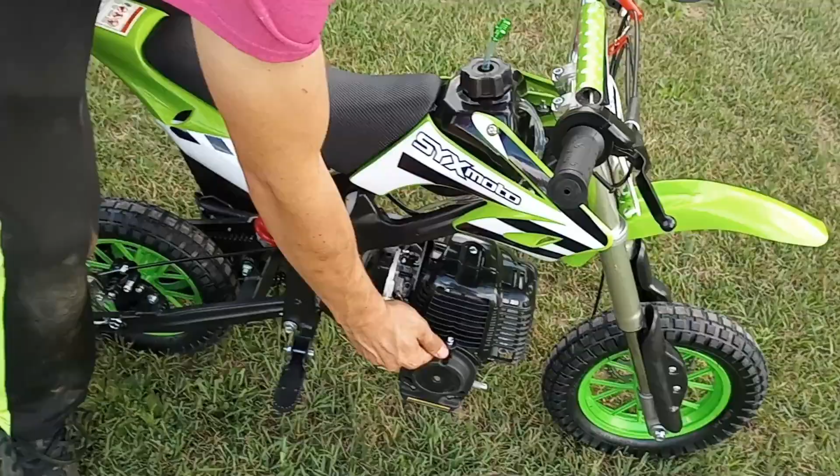How many pulls are we guessing? I got 5. 5 pulls? I'm saying 3. I'm gonna go 7.

All right, in today's video guys, we're gonna go over an unboxing of the SYX Moto 40 MT-2, which is a 40cc 4-stroke little bitty kid's dirt bike. Your age range is going to be probably from 5 to 8 years old. We're obviously much older than that, so we're going to try to drive it too, but we do have a young kid rider that's going to test it out for us and give us the skinny on it, how it handles, all that stuff. But mainly today, we're going to rip it open out of the box, set it up, tell you what tools you're going to need, if there's something damaged or whatnot, or what to look out for.

This is going to be the green one. I believe there was a black, blue, green, and red, and they actually put a sticker over the one that was selected. So I think we got a razor blade, we're going to go ahead and start cutting the box open.

SYX Moto was kind enough to send us this bike to test it out and review it, to see if it holds up to our standards, and for the price point too. It's on sale right now for $379. So less than $400, something the kid can ride around on.

The big seller on this too is it's not a 2-cycle, so you don't have to mix gas and oil. It should be a little more durable, should last longer than a 2-stroke, with sand and dirt and dust.

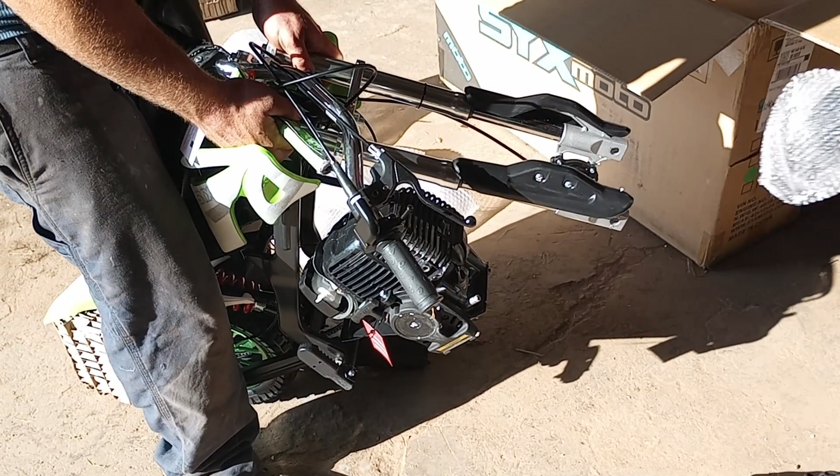Yeah, hold on to these. I like the polka dotted bar pad. Zip tie holds the bar pad, Mark? Yep, the bar pad, polka dotted, nice. Should I pull this?

The shock's just got to get bolted in too. Yep, that's cool, they squish it all down. That's everything there. We'll let it rest for now. It sits, the engine, it's like so flat, it sits right on it.

Look at that, it actually looks pretty sweet with the gear case. It's got like a reduction box here. I'll show you guys a little this jack shaft mechanism, pretty much.

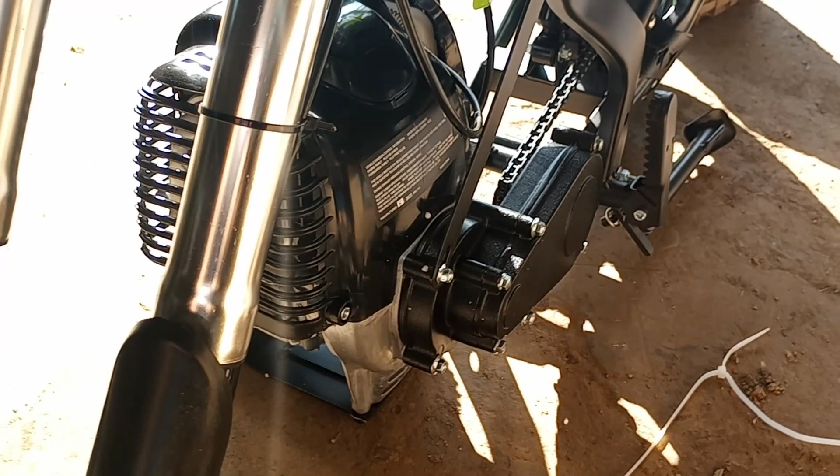And now these, like I said, these bikes are designed not to go fast or accelerate fast. They're meant for somebody that's learning how to ride a dirt bike, like you rode a bicycle, but you want a motorized bicycle basically.

Got a lot of nephews and... Max speed on this bike is 20 miles an hour. We will test that theory, we'll put a GPS on them. Kid, not with us. Not with us, with a young rider. We'll give it a chance to actually win that fight.

But 20 miles an hour is good, and it comes good with a speed tether too, so in case the kid falls off.

Very nice, I will definitely go over the features when we get the bike fully assembled. I want to see right here would be a throttle limiter, so you could tighten that in, and I feel like the more you tighten it in, that'd be less throttle.

Correct, definitely we'll go over all the features once the bike is together. Look at that, all the decals are covered.

One replacement lubrication oil every time, please. Maybe for the gear case. How much oil does it take? For the gear case, or maybe the engine oil, how much it takes? Yeah, they give you a bottle. We'll check the owner's manual.

Toolkit. There's the axle, front, yeah, because the rear one's already in. Front axle bolt. Do you want to get the front axle bolt in right away, and then we can put on the kickstand? Yeah, and then we got some other plastics.

I'd say metal. Is it aluminum? It's so hard, it's aluminum.

Comes with a full toolkit to put all the parts on. Spark plug wrench, 17 too. Wrench, 17, 13, 14, 12, 8, 10. Don't even need other tools, they send you this in a pouch.

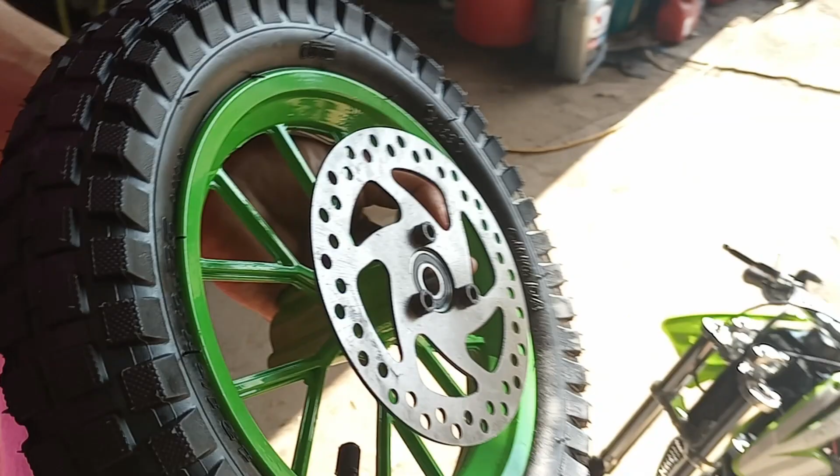Everything for the bar. Probably advise brake cleaning off the rotor. They just put that on there so it doesn't rust, guys, put a little bit of oil on the rotor. It would most likely burnish itself in, but the rims look to be aluminum.

I don't think they're plastic. It doesn't look plastic, it feels like it if you know what I mean. But yeah, that's not a plastic sound, I think that's metal.

Spacers. I'm gonna grab a little grease for the axle bolt. Yep.

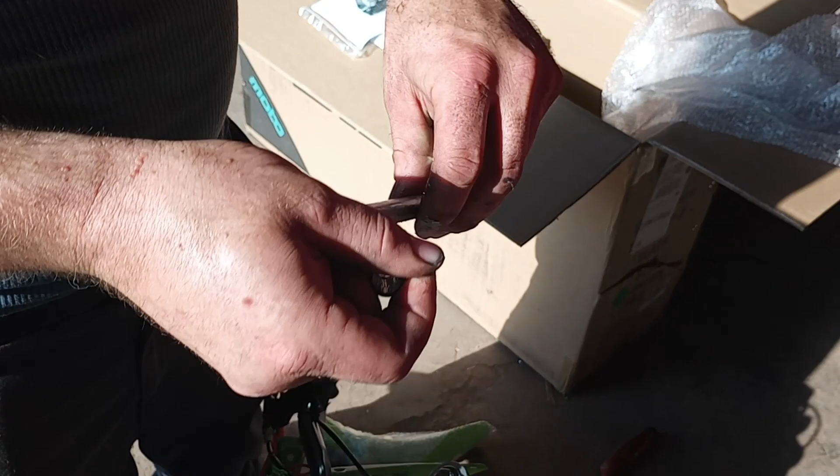One thing we're doing, guys, is we're putting a little bit of grease on the axle bolt that is not supplied with the bike, but you should definitely do that to preserve the bearings and everything, and just so it doesn't rust tight if you ever have to service it.

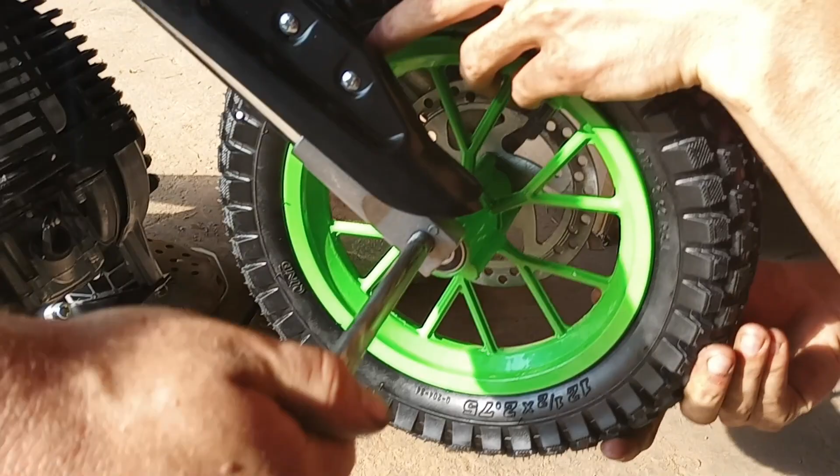There are actually parts available for these bikes too, guys. So if something breaks while riding it, it's not like you can't get parts for it. There were parts on SYX Moto's website, so super cool that they actually have a little bit of part support. That's one of the hardest things with Chinese and non-Japanese machines, the part support.

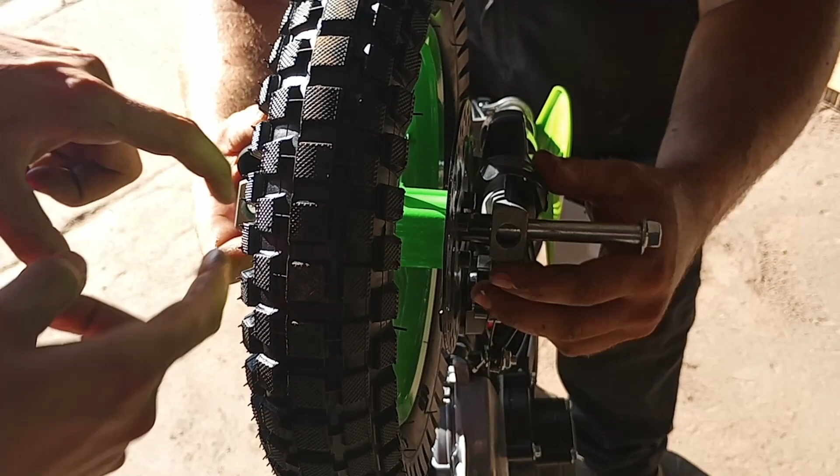What we did to get the spacers to fit in there, because the forks are a pretty tight fit, pried in, so you have to kind of pull them apart a little bit to get the spacer to fit on this side. You have to put the spacer on the caliper side on first, because otherwise you can't fit it in between the rotor and the bottom of the fork.

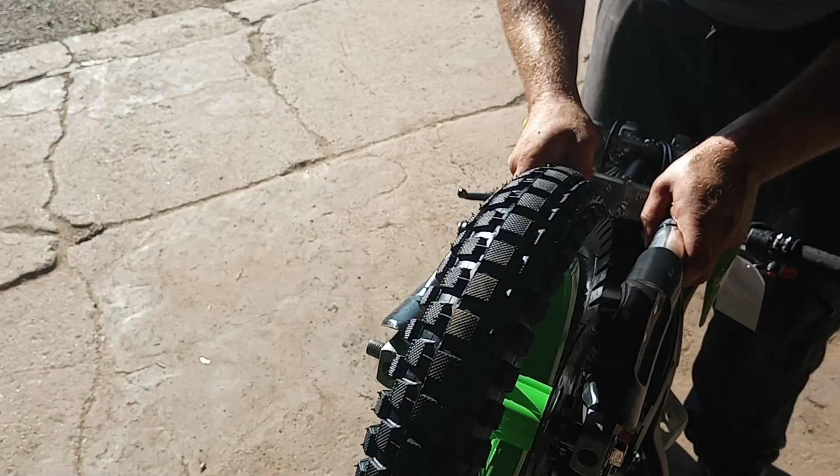The manual does specify to put the bolt in from the caliper side across, so that would be from left to right when you're sitting on the bike. The instructions are about a front and back page of the manual, so not a lot of instruction there, so hopefully this video might be a little bit better to understand than the instructions.

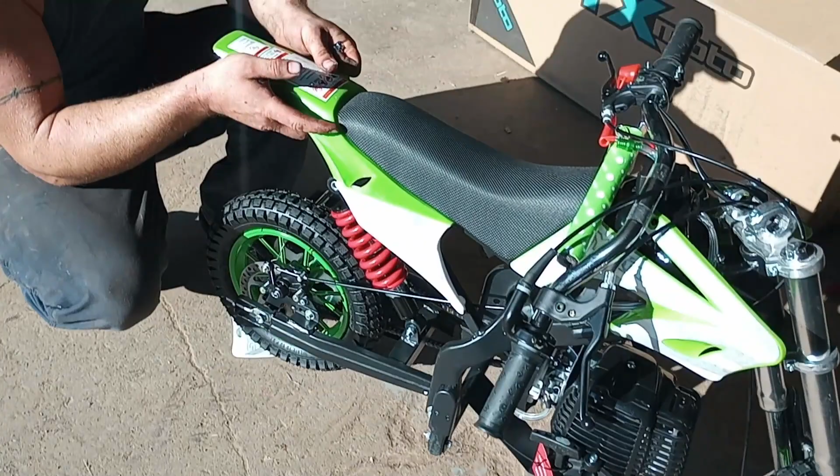The only other thing that we're doing right now is just putting the upper shock mounting bolt on, and that's also going to tighten the chain and everything as well. I assume we'll have to compress the shock down a ways.

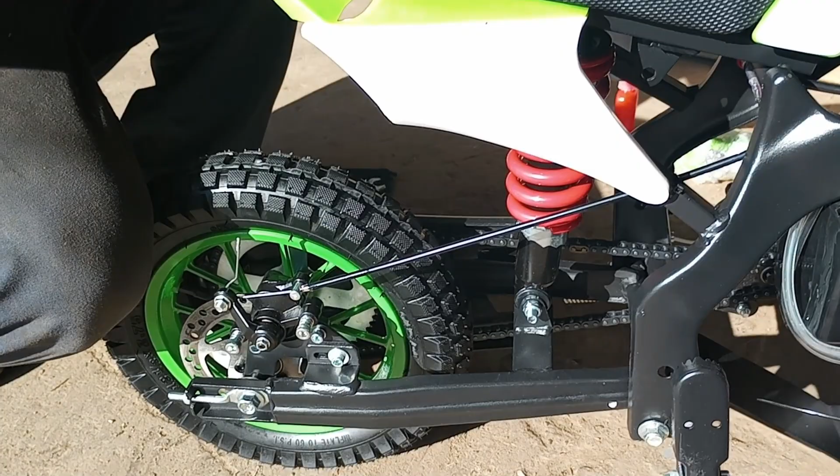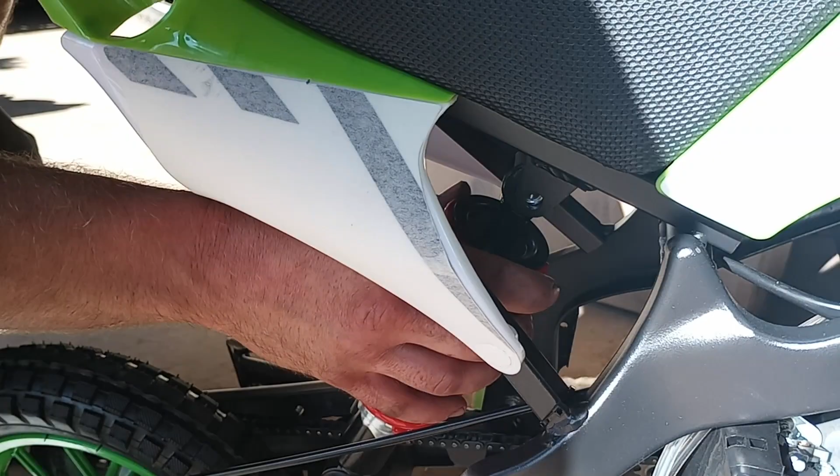Oh, now you got her. It goes way up front there. Oh yeah, you're right there. Right about there, guys. Let's pick it up a little bit. There you go.

Yeah, because it's the nuts on that side on the bottom, so we'll put them the same way. She sits pretty stanced in the rear. Yeah, and it is a nylon lock nut, so it's gonna get tight right away. Nice, so where's that 10?

Foldable foot pegs, I see. Yes, with nubbies. Oh, okay, throw something for the shoes to sit on. Right, highly recommend wearing closed-toed shoes, not an open foot. So what our mechanic is wearing right now, Crocs, would probably not be ideal.

You're going to want to wear something like I'm wearing, like a work shoe or a riding boot, or anything that's not going to get your feet exposed, because obviously there's a moving chain and other stuff you're going to encounter.

I'm just pulling the bar clamps off so we can get the handlebars set on there. Caleb's going to rip off the very good tape they wrapped everything with. The wraps are good, guys, no damage, dirt's not going to get in there.

We're using the supplied Allen hex key that came with it. Everything's supplied. You could use your own tool, but we're just going to show you the kit for this example. You should be able to technically assemble the whole bike with the included kit, so let's prove that theory.

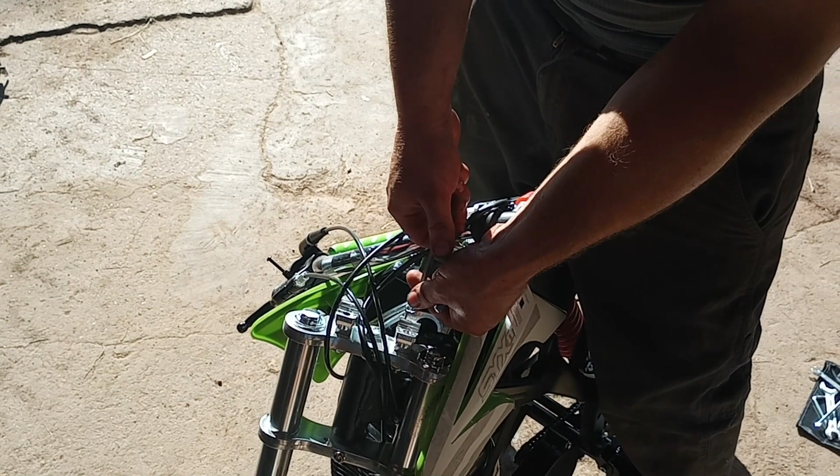So far, so good, guys. You just got to tighten the axle bolt. The hardest part was probably the front end, it takes two people to do that. You have to put the whole front forks a little tad bit apart to get the spacers in there. And it's nice to have another person to get the rear shock in too, because it'd be quite tough otherwise.

If you guys are looking right now, you can see the knurled portion of the bars. Obviously that's going to go where the bar clamps are, and that kind of centers it for you. This would just bolt on with these two Allens right here for the front.

The fender and that plate should also go on at the same time, yes, the number plate.

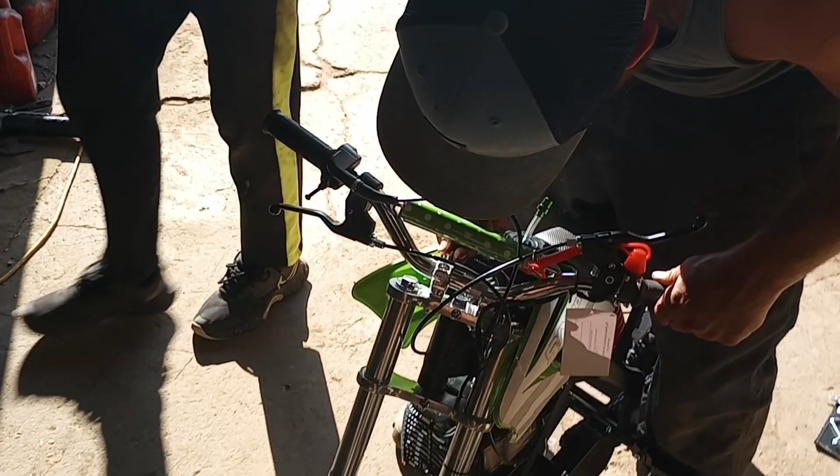Would you like me to put blue Loctite on these? No, because you might need to adjust them, so it's totally up to you guys. What I would recommend is find a good spot where they are, then you could always Loctite them later. For now, we're not going to Loctite those bolts, but in the perfect setting you may want to use some blue thread locker.

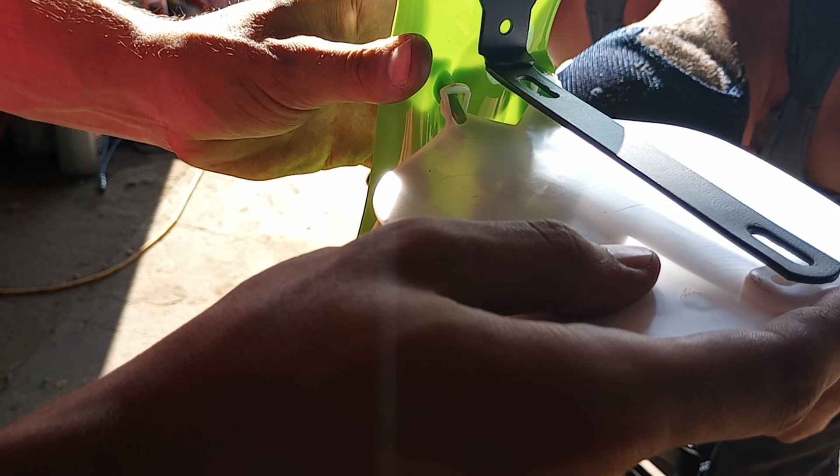So for the number plate, it's only going to bolt in with one bolt on the top. You're going to put those two down in there on these two little clips right here, and then through the paper. I'm going to have to pull on the paper a little bit to get the bolt started.

What you're going to have to do, though, is tighten the first one on there first, and then put the plate on, and then go through, because you won't have access to the bottom otherwise.

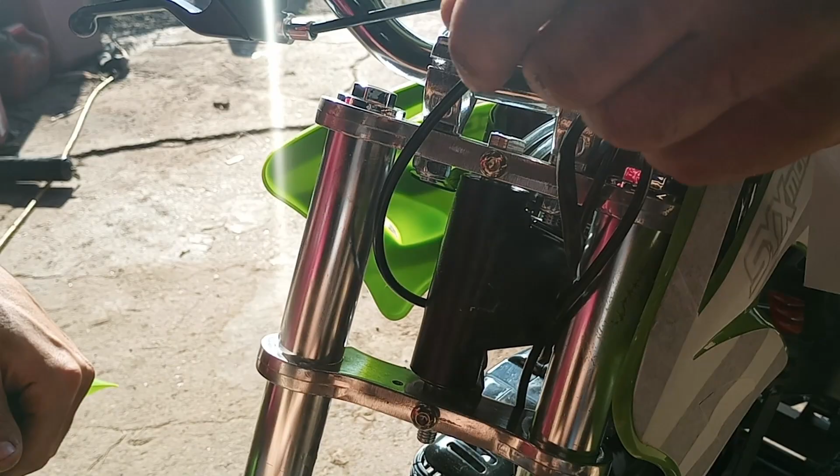It's a little tough with the Allen key, and with how big Mark's hands are, the gap in the bars is very, very small, so I'm just kind of doing them by feel here. I'll put that one in, and then you'll have to basically take your levers and center your knurls, splitting the difference.

Metal fuel tank. Oh, really? Yeah, well that's cool, less chance of damage. I mean the welds don't look bad either. Looks like sealed bearings for the stem up there from what I can see.

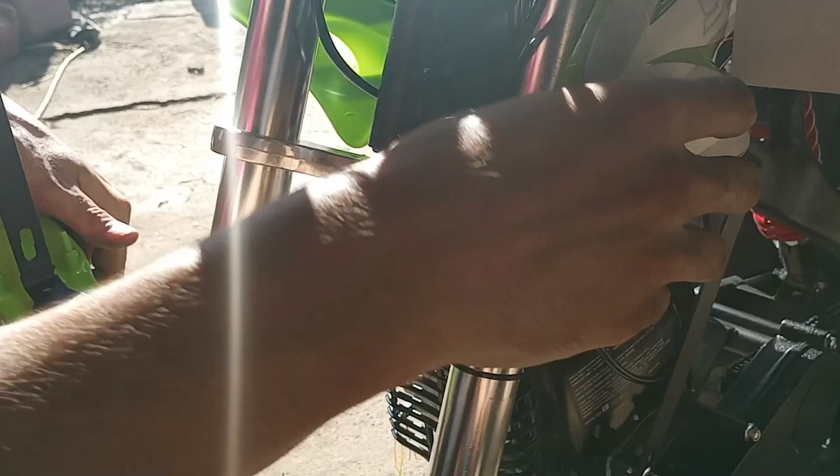What I would do is double check the torque on this bolt and this nut right here, for sure, that's going to hold your front end to your main frame. Very important. I see that it's got plastic bolts in here, yep, there's a whole baggie kit we have to put the bolts for the plastics in, these here too, so looks like it's all the plastic bolts.

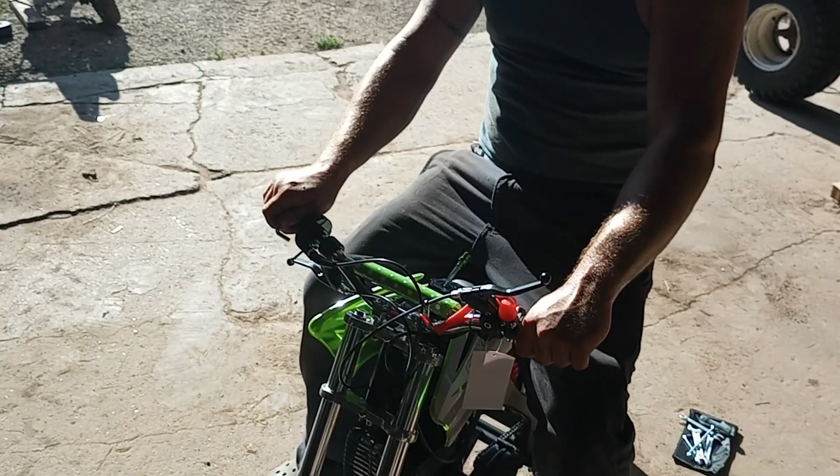Wow, this thing's actually... Mark is like 5'10", 185 pounds, so let's see what the technical specs say. Oh, max weight, guys, is 165. So I would technically be fine, me and you could just about ride it. I cannot, sadly, guys, I'm sorry.

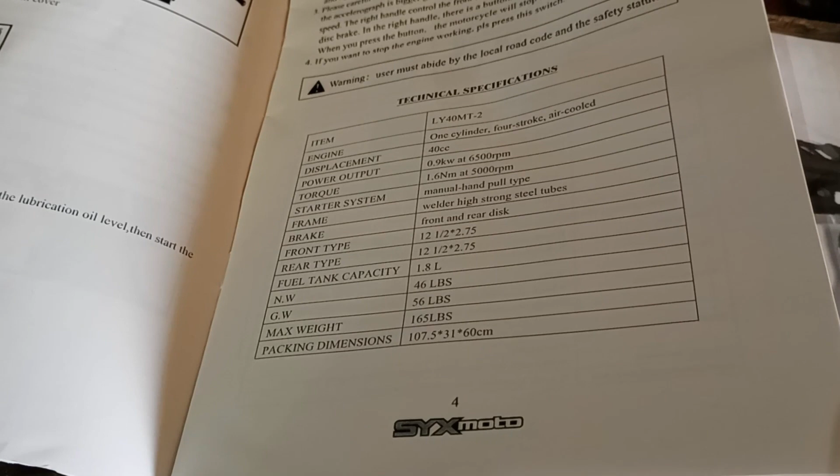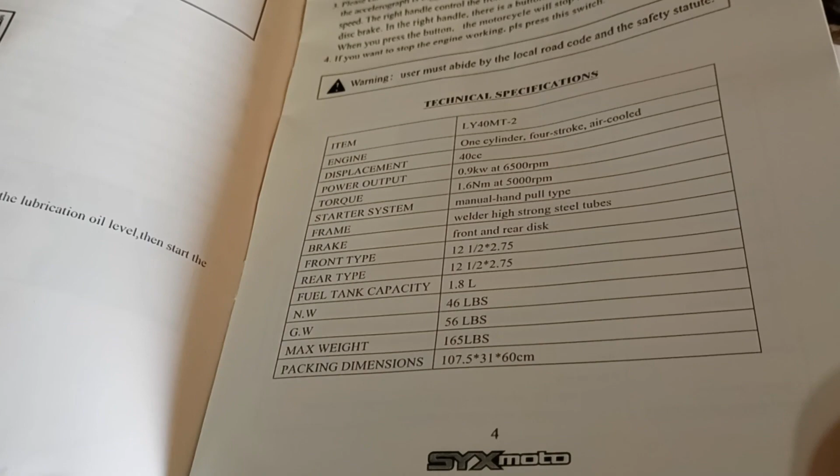So there's the specs, guys, if you're curious. Like I said, it's a 4-stroke 40cc. There's some of the horsepower specs, tire sizes, fuel tank capacity, dimensions. I'm trying to look for seat height on it. I will do a tape measure of the seat height for you guys. I know that's one of the very important things that many new owners are going to want to know based on your operator's height.

So when we get it all assembled, guys, we'll measure tire pressures and the ride height. What you want to do, guys, is line up this top hole, because it's only going to go as high as the bolt is there. Right, it's going to touch the metal.

The stem bolt is sticking out, so you just want to go touching that, and that's going to give you enough to get that front or upper mounting bolt in. Correct, okay, try to.

Run into any issues with threaded holes? Everything good? No, bolts went in perfect, so that's good, guys. Sometimes it could be troublesome, some bolts don't want to go in.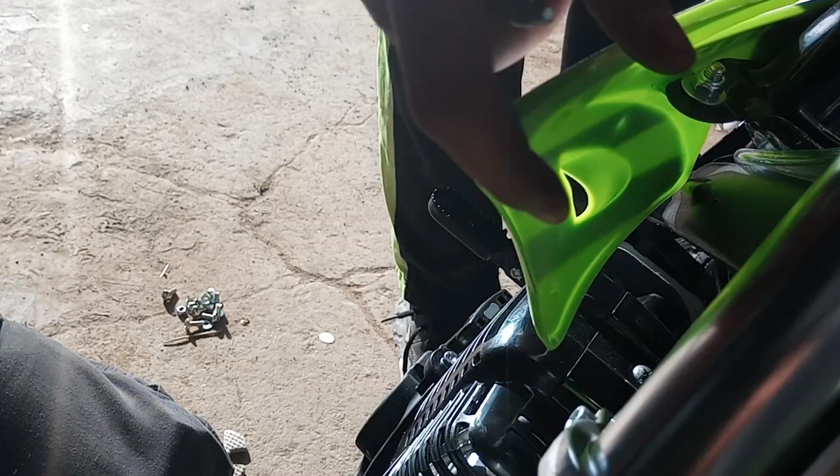The main thing is the throttle cable. You want to make sure that's absolutely not restricted and pinched. I'll show you guys a very important step to check throttle cable binding. What you're going to want to do is put the plastic under the metal bracket. We actually bent the tab down a little bit to make everything line up.

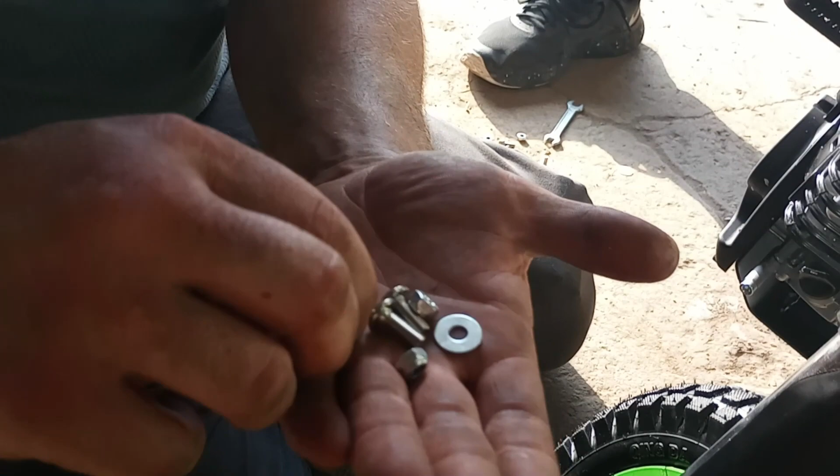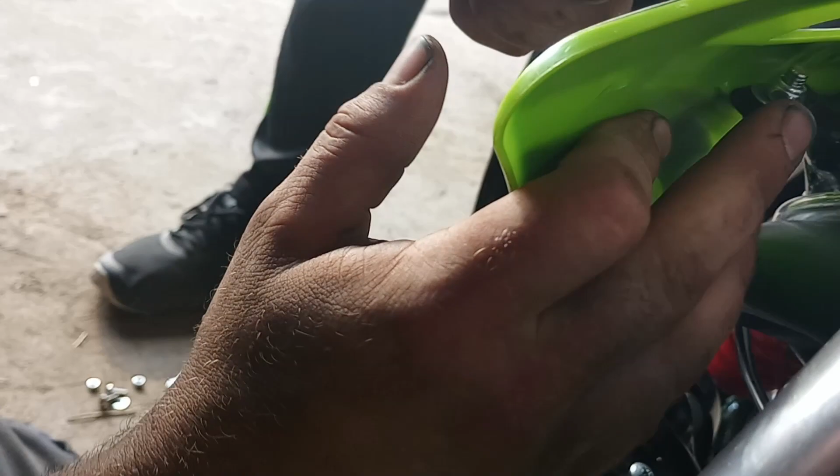So in your toolkit, get a bunch of nuts, bolts, and washers. You'll see that some of the bolts are shorter and some are longer. The shorter bolts will go into the top of the gas tank, through the actual fuel tank, whereas the longer ones you'll want on the little ears that come off. You'll want a washer there too. You'll see there's a really large hole on top, and if you put the nut through, it's gonna suck through the little ear on the tank, so you put a washer on those.

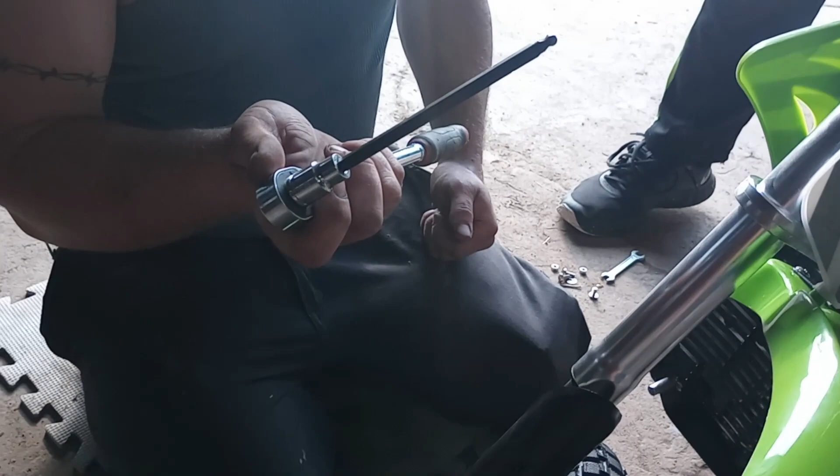Just for speed, we use a ratchet and some other sockets and wrenches. It can be done with the kit, but just for our purposes it's a little easier to. It will take you twice as long otherwise, for sure. So far our total time was probably, what, 15 minutes?

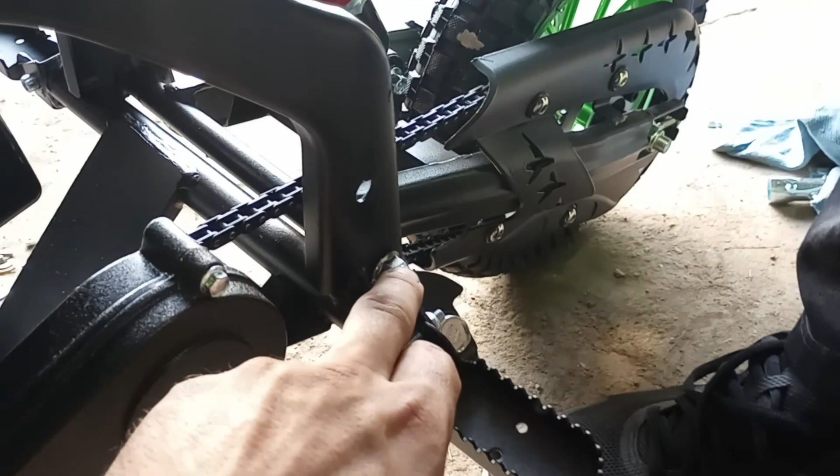Perfect, everything's golden. We adjusted the levers. The only thing I see with the throttle is it's pretty hard to twist, so for somebody that's younger, that could be both good and bad because then you can't pull it too easy. It's hard to whiskey throttle the thing, so you can't crack it and flip it over. But like I said, you're going to have to work to really accelerate all the way. I think once you get it pulled, it's not that hard, and it might wear itself in and get easier, you know.

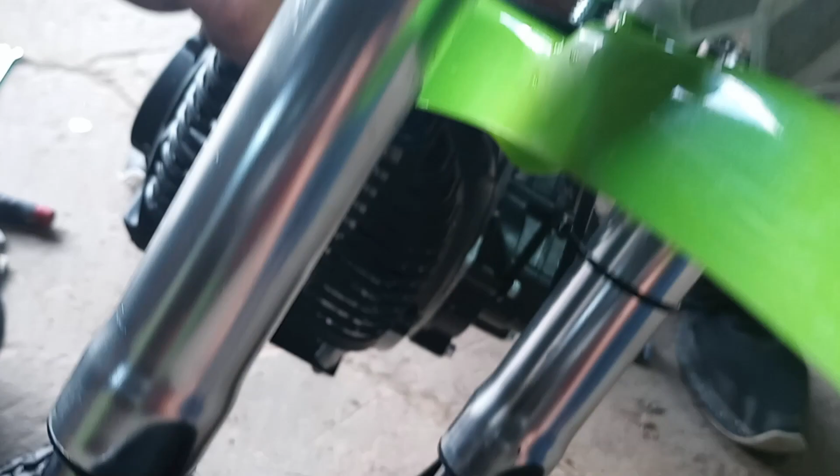One other note when putting the front fender and this little plastic cover on, the main bolt that runs through your frame there, it does hit on there. So you kind of have to push up a little bit on the plastics to get your top bolt in. Not anything out of the ordinary, it is all slotted. You just have to push up a little bit on it to make that bolt go in.

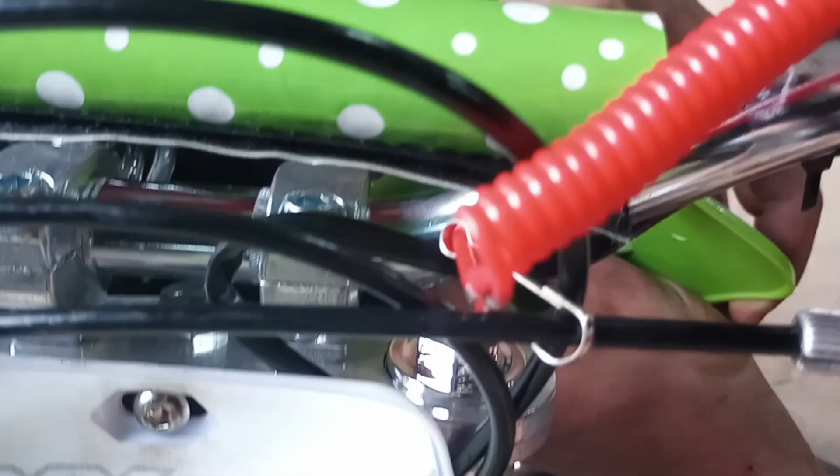You don't need a washer on these top tank bolts because there's already like a recess in there. So right there, you don't need a washer. And those don't need to be Hulk tight, guys, just snug.

So just a little side note here - the plastic that goes through the little ear on the tank, the hole is a tad small. You do kind of have to thread it through there first because it is kind of difficult to get the bolt through, but you almost thread it through it, and then it does go, but the hole is not quite big enough for the bolt to just slide through it like the rest of them. Which is nice because then the plastic doesn't fall out when you take it off.

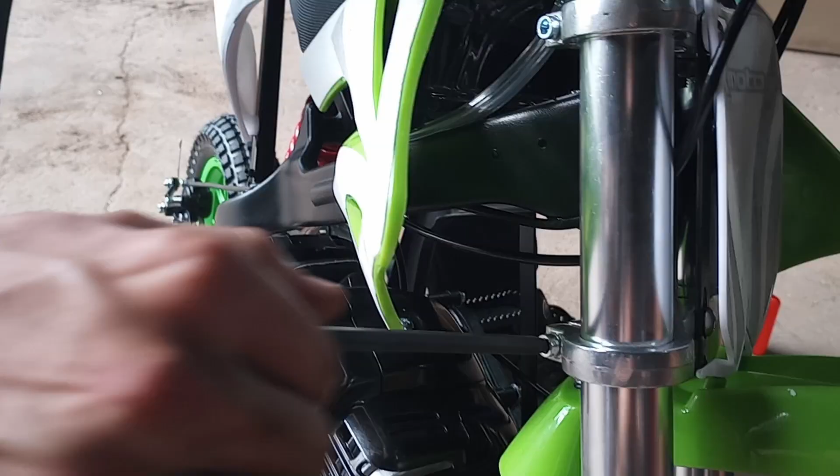We're checking the triple clamps. They were kind of loose - I wouldn't say they were loose, but we definitely got about a turn at least out of each one. Same size Allen as everything else, so it'd be here and here on each side. So we checked that just to make sure.

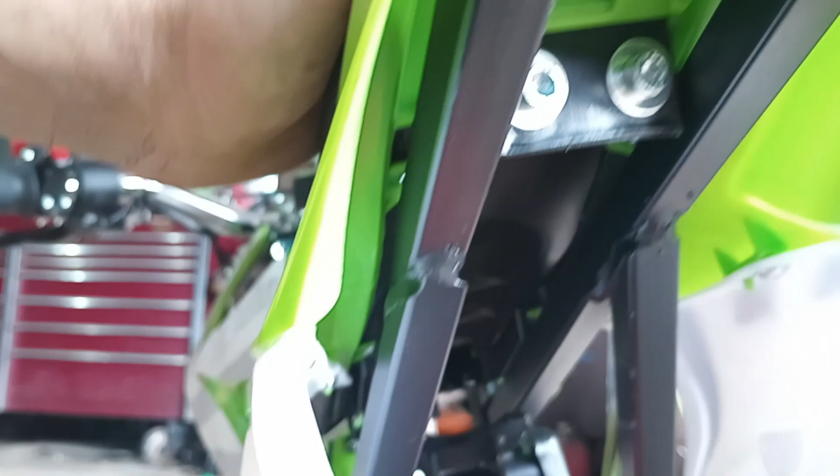We still have to put the two in the rear fender, and then one underneath too. Yes, one under the seat, which I'll show you, to kind of hold the plastics on. So the right one was in there, and I put the left one on there to match. It is different - you'll see that this is different than all the rest of the bolts that we just put in.

Alright guys, we're going ahead and inflating the tires. The tires say 60 pounds - it had 5 in it. You're going to have to find access to an air compressor or some way to get them aired up, and an air pressure gauge to check it. You can get like a $1 gauge at any automotive parts store, Walmart. Then we peeled off the protective covering on the decals - 60 front, 60 rear.

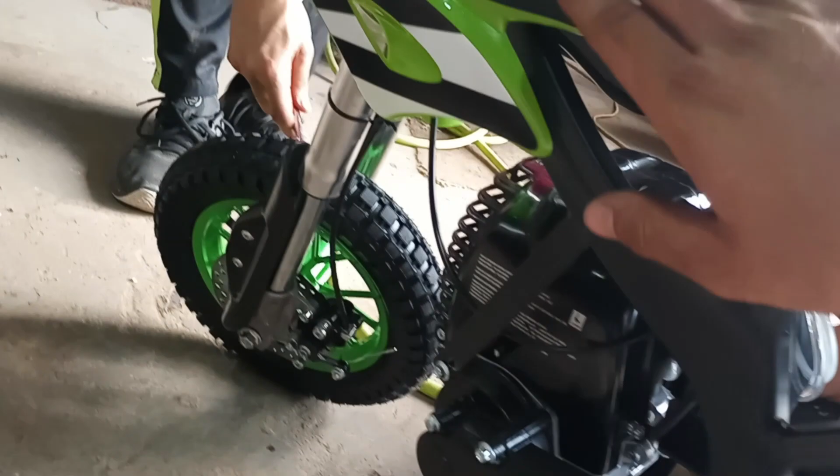Last thing we're doing is adjusting the chain, guys. In my personal opinion, that chain is way too tight - there's not an inch of slack in it at all. When you sit on the bike it tightens it more, and when you put a load on it by revving the engine, it's going to tighten it further. What that's going to do is prematurely wear out that sprocket bearing on the gear case. You can play a guitar with it.

So what we're going to do, I'll show you how. Loosen the axle bolt, then play with these adjusters and back them off a little bit to get the wheel to move forward and get slack in the chain. Take a Sharpie and mark the nut and just go one turn on each, until there's enough slack in it.

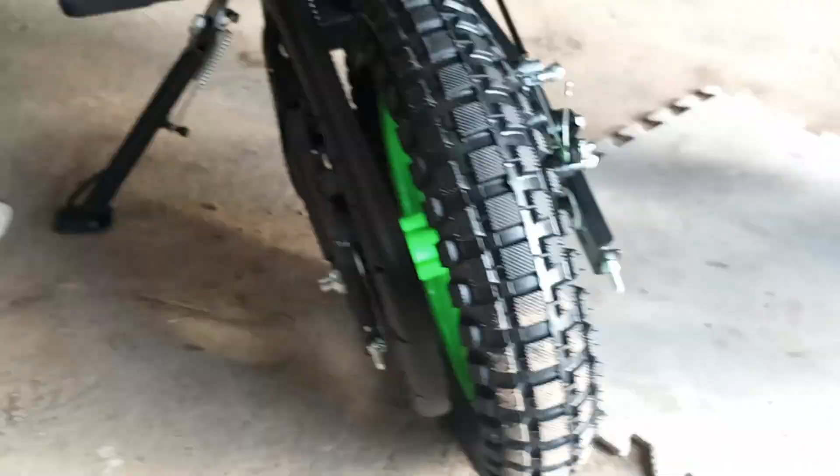So we're just getting that nut loosened up a ways. You don't have to take the bolt out or anything, you just got to get it loose so the wheel can slide forward and back. Just about there, you're good - as long as you can turn it, as long as you can spin the axle bolt.

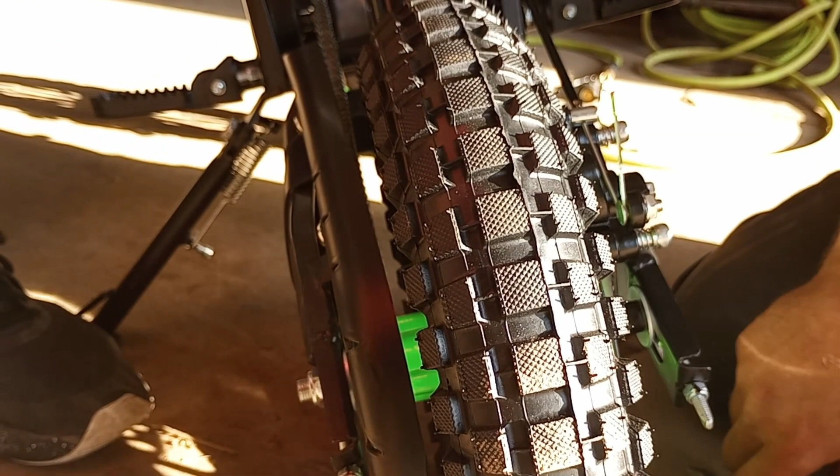Marking the nut and the adjuster frame rail part, then you know exactly one turn, and you can do it on each side. Keep the wheel straight. 10 millimeter wrench. What you could do, guys, is put it up on a little stand or a basket to keep the wheel off the ground.

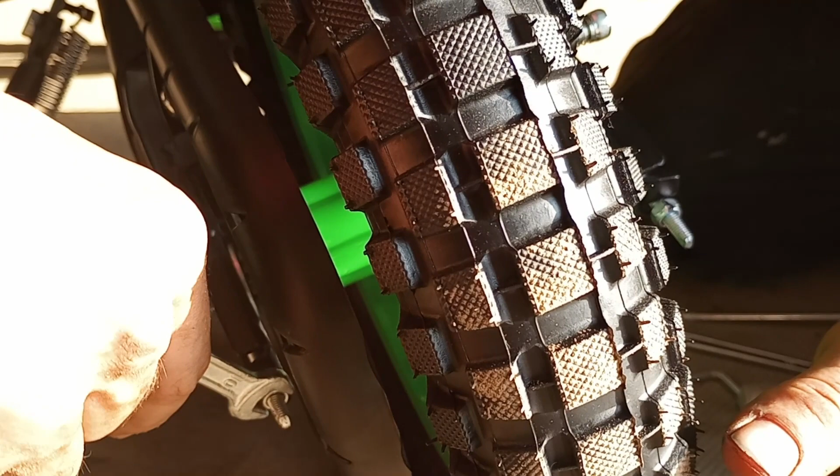What we're going to do is just kind of poke the tire forward a little bit. How many turns you go? Just one. If it's too loose, maybe go a half turn - probably go a half turn.

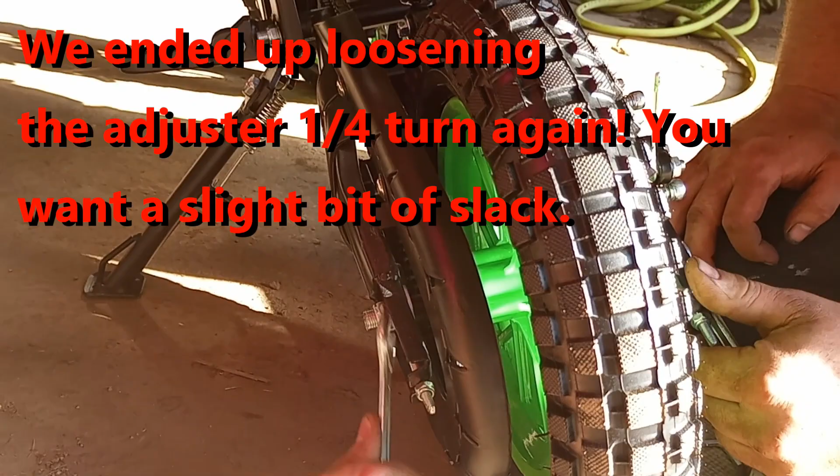Perfect, there we go. Now you got to watch though, because it could tighten up potentially when you tighten it down. Don't forget to tighten the axle bolt. You may want to use a larger wrench than what is supplied with the kit, just because with that wrench your leverage is not going to be that good.

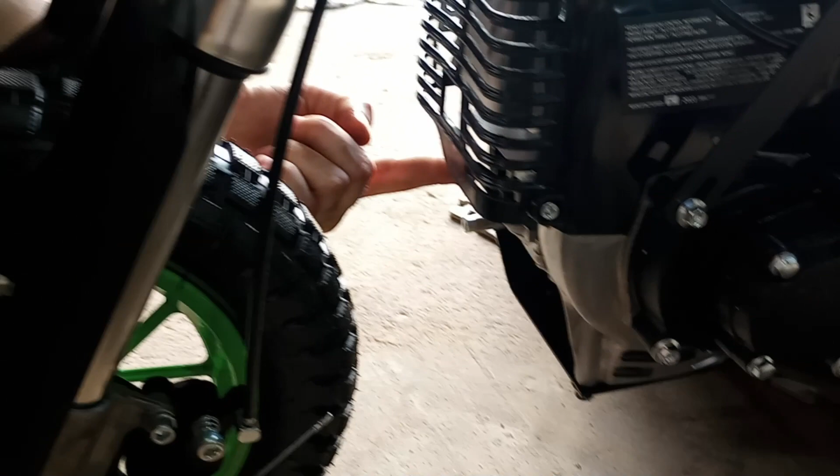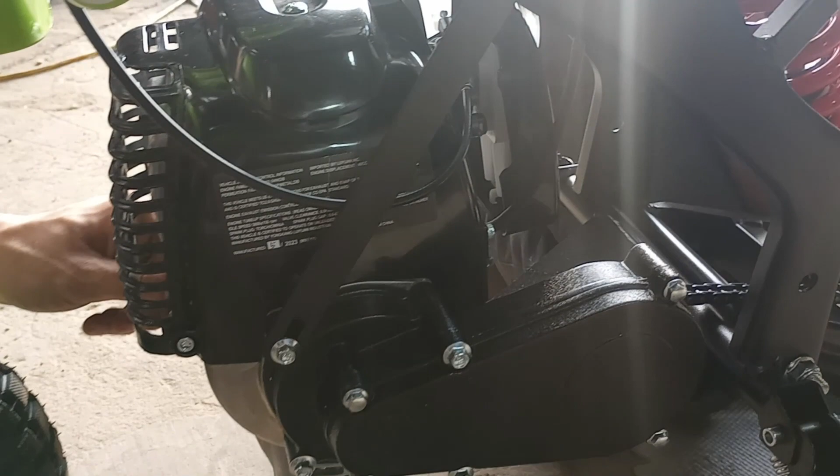Next thing is going to be checking the engine oil. Before you start this engine for the first time, make sure you check the engine oil. You should really check it before every ride too. That's what the sticker said that we pulled off the ripcord. There's also a warning decal that says check oil before first use - that's right on the pull start, so you'll see it.

Make sure the bike's level. And looks good to me, right? Yep, right up in there. We're full - basically you're going to be all the way up that little short dipstick. If it's pouring out of the spout, it's too full, and if you can't see it on the dipstick, it's not enough. So it's very simple that way - it's the easiest thing to do to save the whole life of the engine, because if there's no oil in the engine, you're going to blow it up.

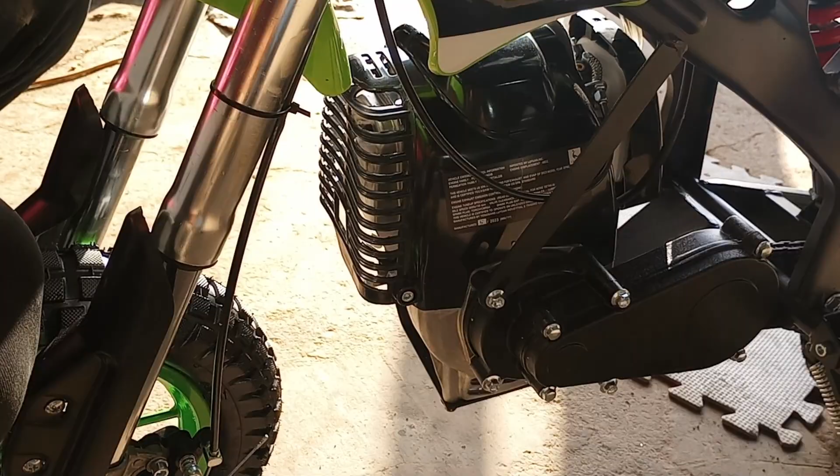Only thing we're missing is a little bit of non-ethanol premium gasoline. You don't want to run ethanol in these things because the carburetors will gum up. It might not gum up right now, but next year when you take it out to use it again, it's going to be all full of nasty gas and it won't start for you. So make sure you run non-ethanol gas and you'll have very, very little issues.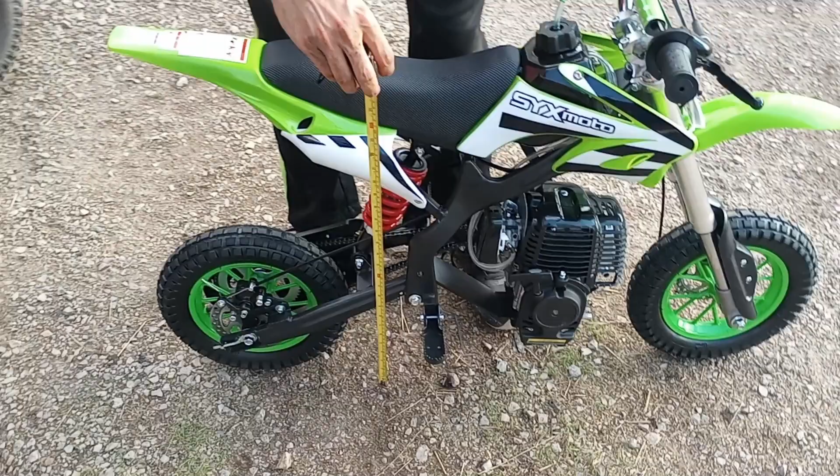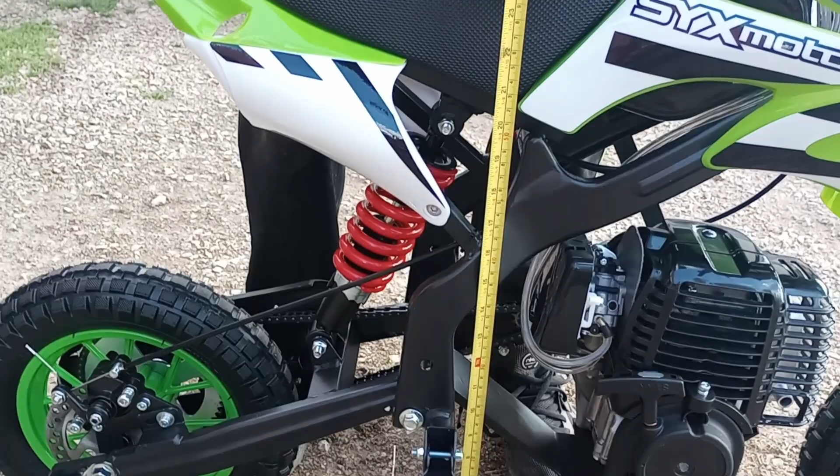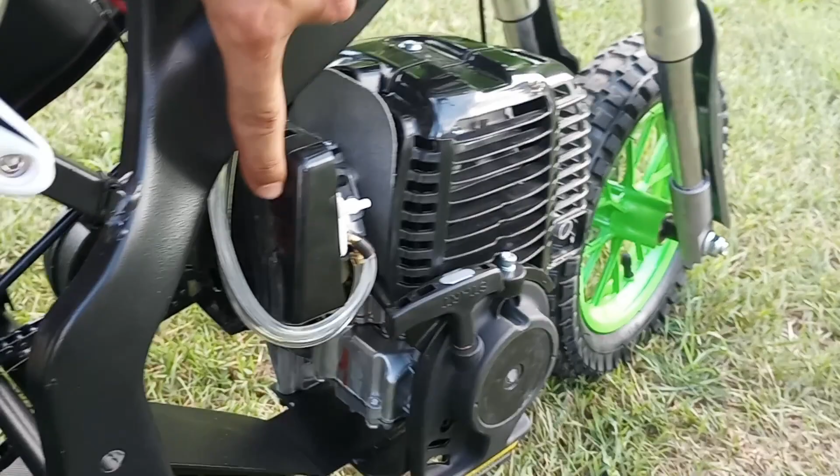What we're going to do is take it out in our front yard. We put premium gas in it, and we're going to pump the primer. The manual states several times you're going to pump it until the primer's full and it's not getting any more gas in the primer - probably a good 5 to 7 times. That's each time you're going to start the bike. When you first go to start it cold, you're going to have to choke it and prime it. There's actually an arrow on here that says down and then choke - press that down, which closes off the intake.

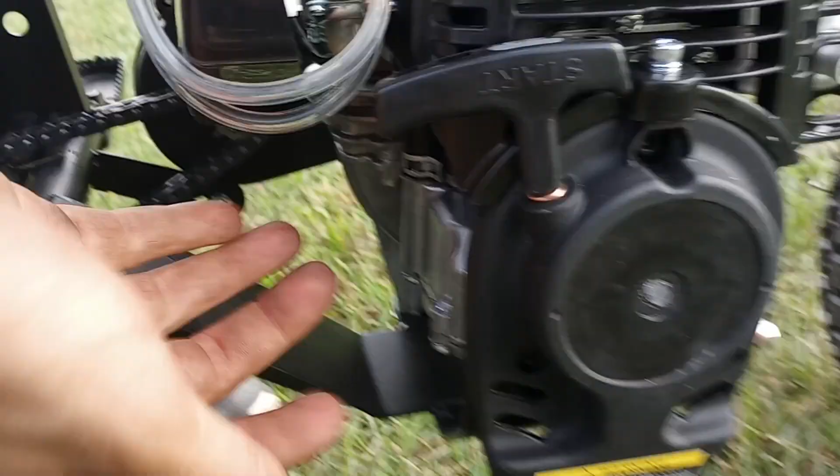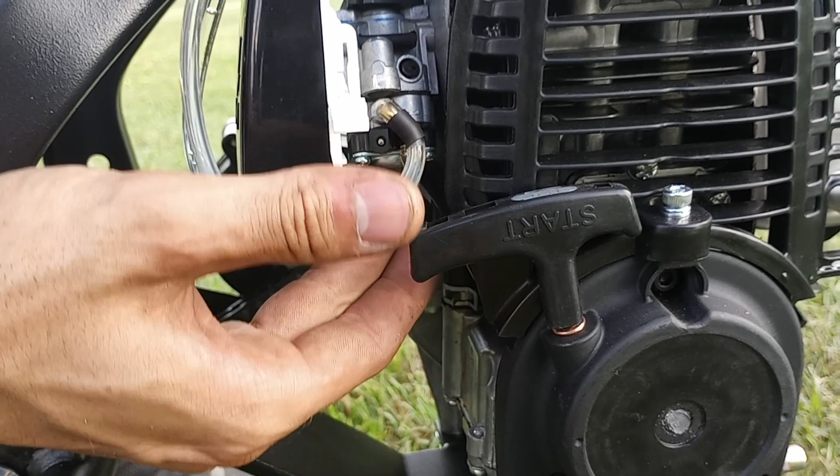And then we're going to prime it, which is on the bottom - this bulb right here. Mind you, the tank was bone dry, so it's going to take several primes. I see it coming. We keep priming it, and we got gas in our bowl. We keep priming it.

And that is about enough. If it doesn't start, you can always try to prime it more. What Mark was saying is you'll see the gas coming out of the return line back to the tank - then you know your carburetor has filled up and it's going back to the tank. You can never flood these engines. You can pump that primer 50 times and it's never going to flood the engine unless there's a damaged component inside the carburetor.

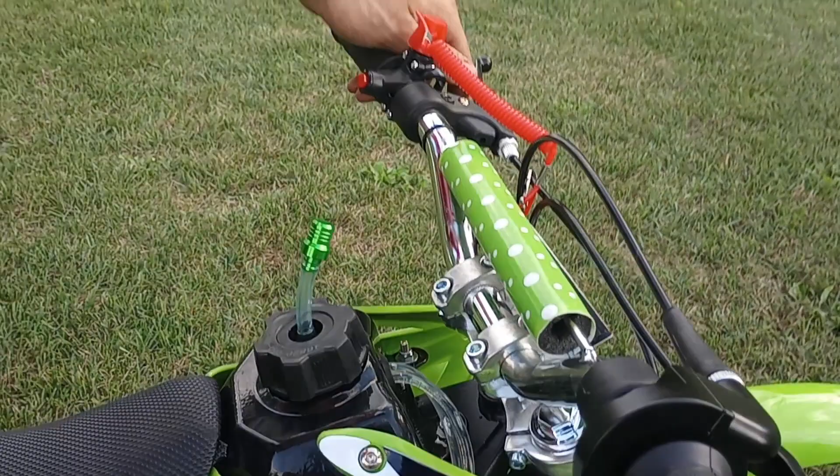But once again, there is a tether switch, which anytime you are riding it, guys, have that hooked onto your person, like a pant loop, or if it's a kid, maybe find a little wrist strap. You can buy a wrist strap and clip it on. They have a chest protector or something too, might have a little clip on there. I know they make little wrist bracelets you clip onto, or Velcro it.

So what we're gonna do is get the choke on. But all the brakes did work. I kind of just did that, and perfect.

You want to go through the preliminary checks the first time you ride it. And like I said, that throttle limiter - you can see if it's pulling wide open too, it'll hit that stop there. So yeah, we're pulling wide open. To reiterate, this is the throttle stop - you'd loosen the jam nut, tighten that in to limit the throttle throw, so you can't go wide open. If somebody is beginning and you want them to only go 5 miles an hour, you'd push that in, so then wide open will only be 5.

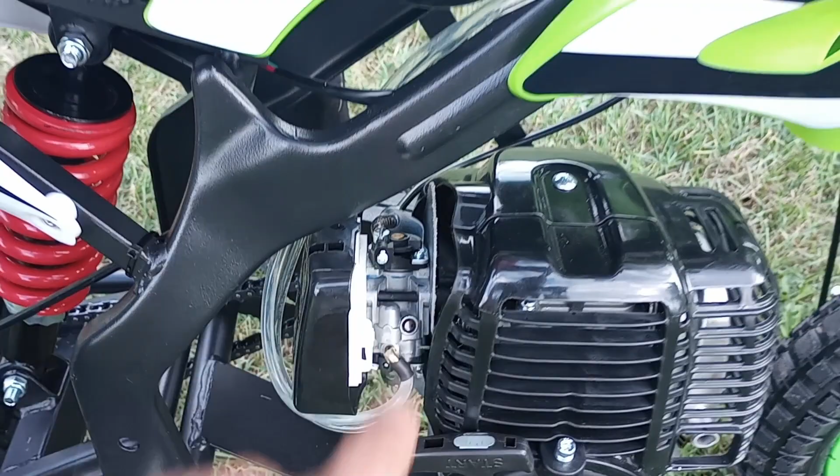This silver screw, like I said, is the idle speed. So if the engine would be idling high where it wants to creep on its own, you're going to back that screw counterclockwise out. If it's idling too low and barely staying idling, you're going to turn it in just a skosh. You never want to turn that more than a half turn each way at one time. And you want to do it when the bike's running too, and it's warmed up.

How many pulls are we guessing? I got 5. 5 pulls? I'm saying 3. I'm going to go 7. All right, 3 pulls, 3 pulls. Nice and quiet, guys.

A choke - we slowly take the choke off. Looking at the bike here, guys, this little screw is your idle speed, and this up here is going to limit the throttle pull. Correct.

Mind, this bike's brand new, so you're going to want to try to - yep, you don't want to take this thing and run it wide open out of the box. You want to take it kind of easy. Oh, nice, quiet. You're not going to make any of your neighbors angry driving this. Nice and quiet.

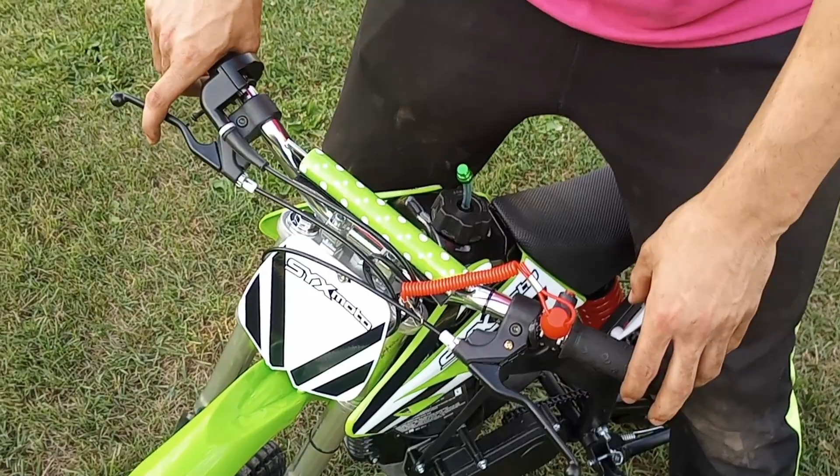I'd say you're ready to take it for a first ride. Now, one thing I was going to tell you is doing a left-right with the handlebars to check your throttle cable for binding. So always do a left-right initially out of the box, because if there's any binding in the throttle cable, you'll catch it before your person hops on it. If you're going into a turn, you want to slow down more times than not, because if it sticks wide open, you'll kind of shoot right through the turn. Exactly. So right now, perfectly fine, no issues.

Obviously, guys, our rider right now is quite big for the machine. Too, yes. So when we have our younger kid rider hop on it, you guys will see.

Go ahead and operate the kill switch once. So the way that works, guys, is it's not an actual push button - you hold it down until the engine shuts off. Also, if you rip the tether cord off, it will also die - same job. Try to restart it.

Nice. Yeah, so that is the SYX Moto 40cc dirt bike, guys. Riding video of this coming soon, but this is the initial startup, and you guys have seen the unboxing. So very, very neat little unit, and started awesome out of the box. Ran like a million bucks.